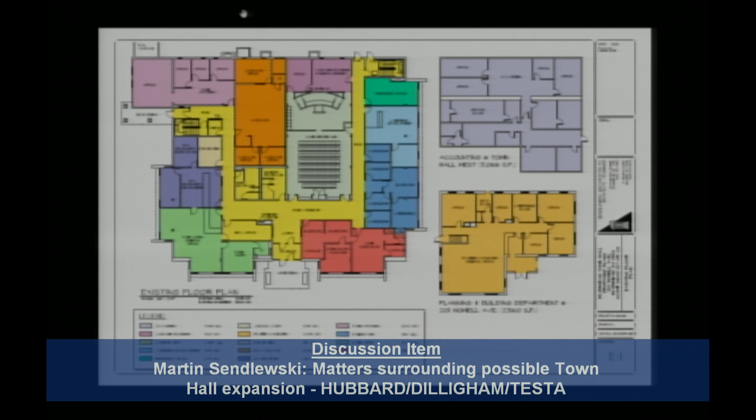What's up on the board here, and is the first page that you have in your packet, is the existing town hall. That's exactly what's here now. On the bottom right is the existing building and planning department across the street, and above that is the existing accounting and IT office in Town Hall West.

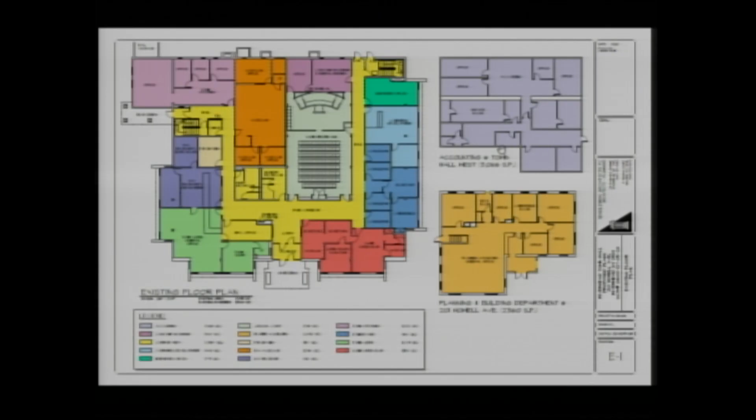So we then looked at what if we built a new town hall on that site as a campus development. That would allow the construction to happen somewhat seamlessly—build the new building, move in, then renovate this building and move Justice Court in, then add handicapped access to the police department and alter the area now occupied by Justice Court for the needs of the police department. What's on the screen is that last scheme, which ended up being the most economical, the most straightforward in terms of constructability, and we think ultimately the best plan.

This page shows the current site. Right here is the current town hall building, this is the current police department, and here is the footprint of the new town hall building. We maintained the accesses on Howell, added parking on the northern end, and placed the building here in a campus style. The town hall stays exactly as it is in terms of footprint. We altered the parking and provided additional parking across the front of the building.

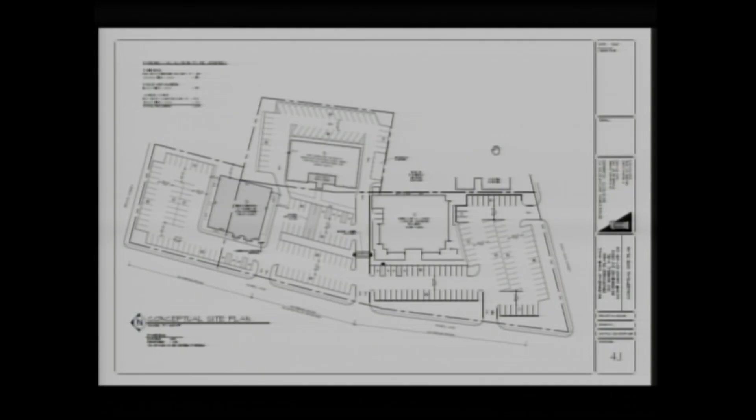We looked at a shared parking option where we came up with a requirement of 288 cars. We have 241 cars on site. One thing to keep in mind: the 288 cars included both justice courts, since they'll have two courtrooms fully occupied at 75 people per room, plus an expanded meeting room for town board at 150 people, all occupied at the same time. So we think there's a shared parking factor that would allow this to be adequate.

We also moved this parking a little bit, and we have a plan to move the Garfield Memorial close to the entrance of Town Hall and close to the flag outside, really where it should be. It's a very nice memorial to a real hero of Riverhead, and you never really see it—when I drive by, you look at it on the lawn, but it should be in a location where anybody who comes to Town Hall passes that memorial and remembers him for his sacrifice, especially coming up on this Memorial Day weekend.

With that, we developed the plan for Town Hall. This is a relatively simple drawing of just the basement. Overall, the footprint of the basement is 98 feet by 98 feet.

Constructability is very good. We have a 24-foot column grid with 1 foot from the center of the column to the outside face of the wall, which gives us a 98-foot by 98-foot column grid, or building footprint.

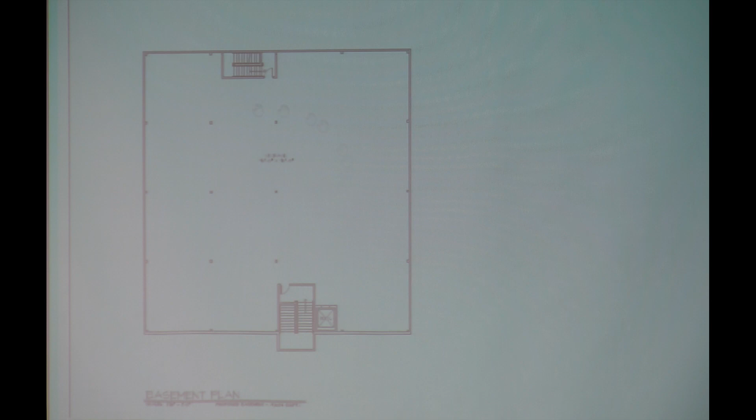So this would be the basement area, which would be utilized for storage.

So as you come to the first floor, what we've done, and what I'd like to explain is what this document does. This is not considered a final plan or a final document by any stretch of the imagination.

What we do as architects is we get the program, which we've established. And what this document does is really establish the fact that we have enough footage in this plan to accommodate the needs of the town. That is really what this does.

But if this were to move forward, there would be much more detailed reviews and design reviews with all the department heads, the town board, town engineers, et cetera, moving forward.

One of the things you'll see on the side of the page here is a legend, and all of the areas are color-coded, and it has the footage of each of the areas next to their allotted space.

If you go back to the existing plan, there is a chart here of all of the existing footages on the existing plan. So when you compare the two, you can see the increase of each department from the existing plan to their new plan.

So the first floor plan here includes a secure entrance with a mailroom coming into an expanded lobby. The lobby has a stair and an elevator to the upper levels.

Straight ahead are double doors into a new expanded meeting room. The meeting room has an IT room for broadcasting, et cetera, and there are 2 public toilet facilities located off of the lobby here.

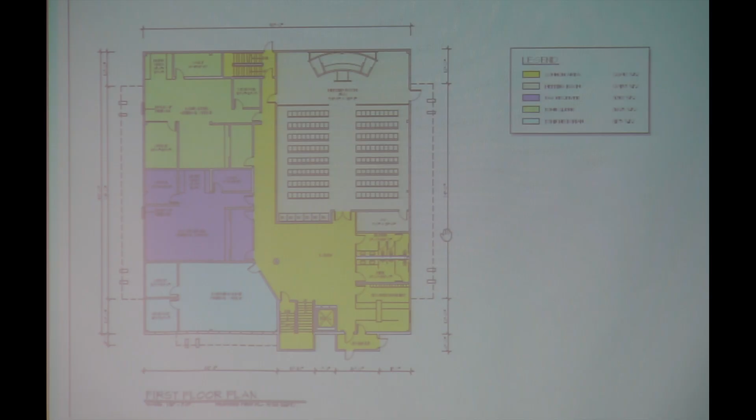So, they took into consideration future needs of departments as well. We asked department heads, do you think you're going to be adding staff? So like in purchasing, they think they might at some point have a second purchasing agent.

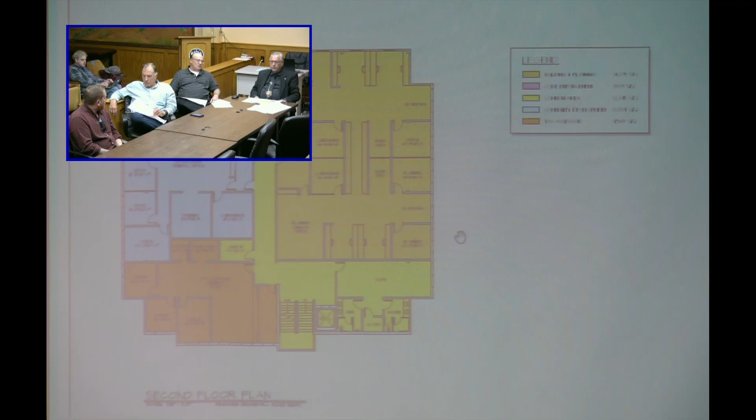So we tried to design the space so that when this building is done and you move in, you're not moving into a building that can't be expanded in the next 10, 15, 20 years. So there is future consideration given to the spaces shown on this plan.

With that, we come up to the second floor, and the second floor, again, the elevator and stair come into a second floor lobby area.

Off of that lobby, we have a staff area. That would be a staff room that would have vending, a small kitchenette, and it would also have staff-only bathrooms. That was one of the requests that came up, was to have staff bathrooms in addition to the public bathrooms, which we thought was a good idea.

So that basically is a staff area. You come down the center hall to the rear stair, emergency egress stair.

All of these hallways are 8-foot hallways, so they're the larger hallways, similar to what you have out in front of the meeting room here, not the 6-foot hallways they have on the side. So they're more than adequate in terms of space and people circulating.

On the second floor, we have the assessor's office directly off the lobby. We have a janitor's closet. We then have the community development office that has all of their needs with lots of expansion for the future.

And then we have code enforcement in the back corner here, and then we have an area here for building and planning combined.

That was one of the departments that, after the discussion, gave us feedback that they wanted rooms accessible for reviewing documents with applicants when they come in, where they could bring them into a small conference room and go over it. Instead of collecting documents and sending them back, they could go over it with them and tell them what else they needed so they could return with it.

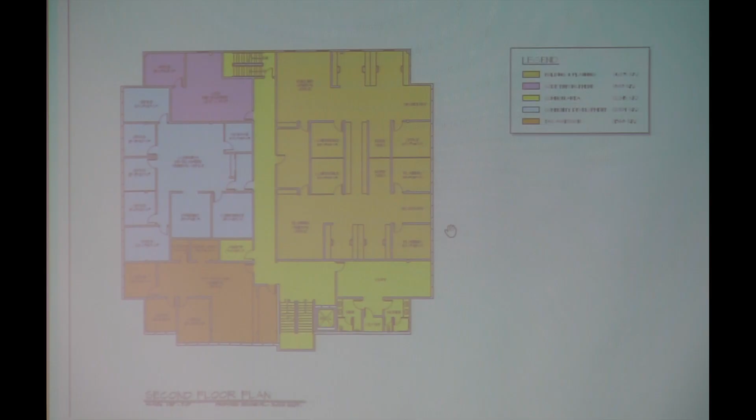This would allow you to surplus the existing building department across the street. You could use it for another purpose, or you could sell it or rent it, but it would no longer be needed. We'll discuss that later as a board, but we definitely would sell it to offset the cost of the taxpayers. That way, it's just a good possibility that they're not going to have to absorb the cost immediately. We can offset some of the costs initially.

The other thought we had was East End Housing, over at 209 East Avenue. They have a facility there. If we could move them into the new town hall as well, that would allow you to sell that structure, which could be used as a house, if we go forward with this as a board. We definitely have to entertain that component, that aspect, to offset the taxpayers' costs.

Then, as we came up to the 3rd floor, again the stair and elevator and hallway, we have human resources, the office requirements they have there on the front of the 3rd floor. And then off of the 3rd floor lobby, you have the town board offices and the town supervisor's office. And those are all laid out.

Again, the layouts are going to be things that would be reviewed with every department, all of the people. I've never done a project where, when we start with a scope and a preliminary plan that defines the program, the plan has been the same at the end of the day. There's always - we massage it, we go room by room and go through the design to make sure that all of the requirements are met when you move in to utilize the building.

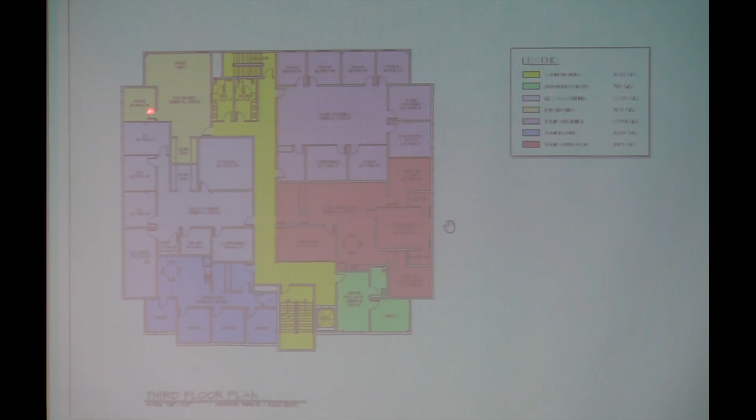After that construction was completed, we then did a preliminary layout of this building without any additions. It's the existing footprint - we would utilize as many of the existing walls and layouts as we could, where basically this transitions into a lobby area with a hallway into two courtrooms. This would be a jury courtroom, which would remain as is, and a new courtroom would be added next to it.

As you come in, there's a secure area with security and a mag. Off of the public corridor are the public bathrooms, as well as a housekeeping office, and then they have two consult rooms for attorneys coming in to meet with people who are going to go before the judge to have a private discussion. As you come to the other end of the hallway, there's a window into the justice court where people could pay fines, etc.

And then you have the judges and the justice court area in the existing area, currently where the town clerk and the tax receiver are. They also have additional facilities for storage, a lunchroom, and their own private bathrooms, in addition to the bathrooms in the facility.

That area connects to both of the courtrooms through a secure area behind the courtrooms, where you also have the jury room, additional storage, and in the upper left corner of the building is the secure area where they would bring in individuals to go before the judge. We have secure lockup, secure bathroom, secure access, and attorney interview rooms for people that are brought in.

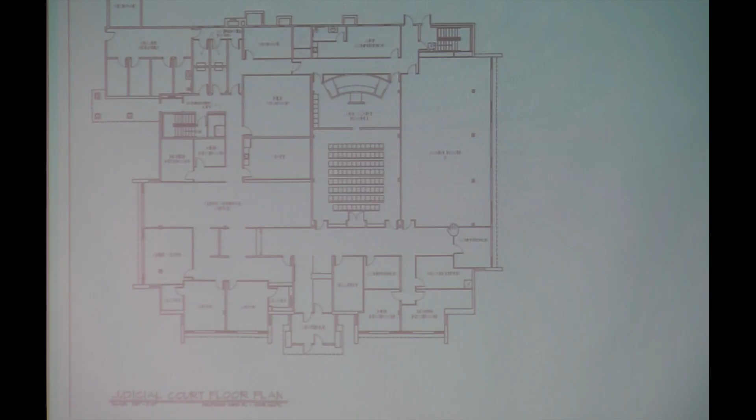All of this would have to go for further approval with the court administration. Again, it's really just a layout where we know that we can accommodate the requirements of the court within the existing footprint of Town Hall. From there, what we did would be the last step, and that is the police department.

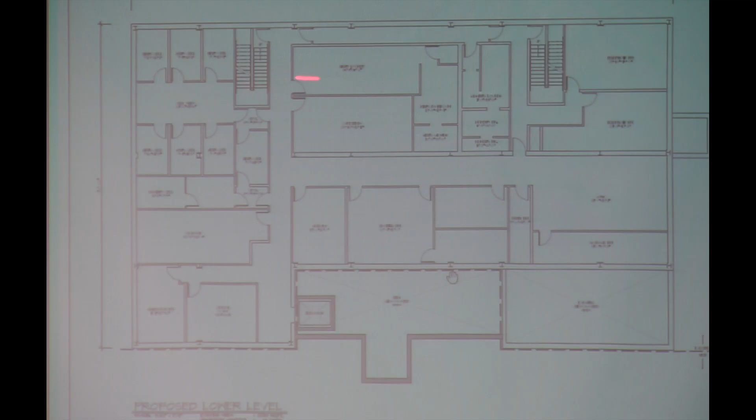This here is an unexcavated area on the lower level, and you see an elevator here. There is a stair here that we took out and created a lower level link to the basement from this elevator so that there's handicapped access. They still have the two stairs internally here in the back of the building.

And then on the main level, we have it set up where there's an entrance. You could go one way up the stairs or the other way up the elevator, which has a door on each side. So in the lobby, you enter this side.

On the upper level and lower level, you enter from the opposite side. That brings you to a new hallway that wraps around between the stair and the elevator for the public to approach, and you would have the window where the desk sergeant is. That would be extended forward to what is now the doorway into the building.

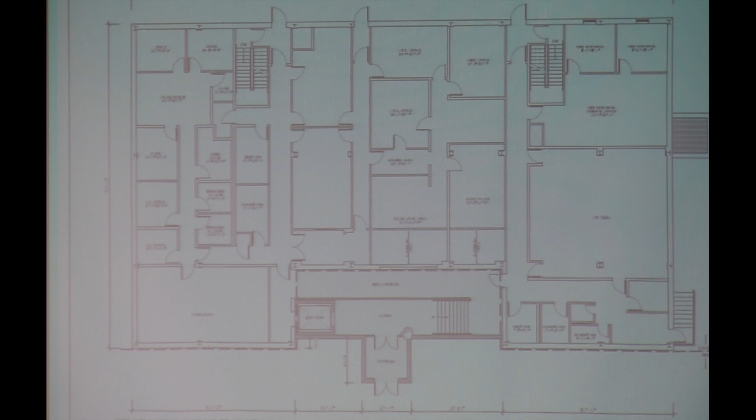So they would gain some space there, and they would gain this entire space where the current Justice Court exits the building. That gives a location for the fire marshal to have his own space also. So with that, now I'll get to the next part of the presentation.

What does it cost? What I have here is the cost of the different components that I spoke about in each of the different schemes. So we had a scheme where we were just doing handicapped access and improvements to PD.

We had the scheme where we were adding the Justice Court on top of PD, which then required not only the front elevator and access, but a secure elevator in the back. We had the second floor addition here. We had the standalone court. We had the standalone town hall.

So what you see here is itemized one through five. The standalone court building, when we completed that, was 11,025 square feet. The cost was approximately $11.5 million, $11,493,000. The PD, with just handicapped access and renovations, came in at $1,158,000.

The town hall expansion with the second floor over this building, which is the most expensive project because of the type of construction, and again, being over this building, was $19,176,000.

The Justice Court addition on the police station and the improvements to the police station for handicapped accessibility was $15,381,000.

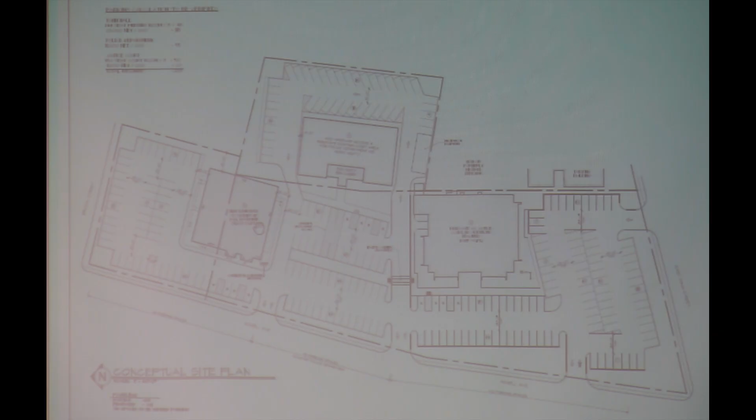One of the things we wanted to do was take the area that you cross in front of the building. Let me go to the site. What we wanted to do is take a look at the parking area in front of the building, where we could also do that area with drainable pavers, similar to what they have at, say, the aquarium, and do that with landscaped islands so that you could have that blocked off on the weekend if you had a function, or even if you had something going on during the day, you could set that up as an alternate area.

Plus, we're looking at the siting of the building. I held the building 25 feet off of this corner. If we could site the building a little bit closer to that line, take about 12 feet, about half of that setback, and push it back a little bit further to this corner, that opens up more area in the front of the building. That expands the area, in addition to that paver parking area, so even if the parking lot was not closed off and was utilized, we would still have an area in front of town hall for those types of functions.

So we would look at some type of a canopy, and again, really important, having the Garfield Memorial, as well as the town flag and the American flag at that location. So it would be a nice area we would dress up. It'd be something nice, have people come together, whether you have something to give away, or you have a press conference, or some type of event.

And with the first floor lobby being open up for bathroom access, if you do a function on the weekend, the rest of the first floor stays secure. So it works out well. That is a good point, because you could have the front of the building opened up, and you could have a function outside with bathroom access, and it's a pretty adequate lobby. We have a nice lobby space, so that could work out very well.

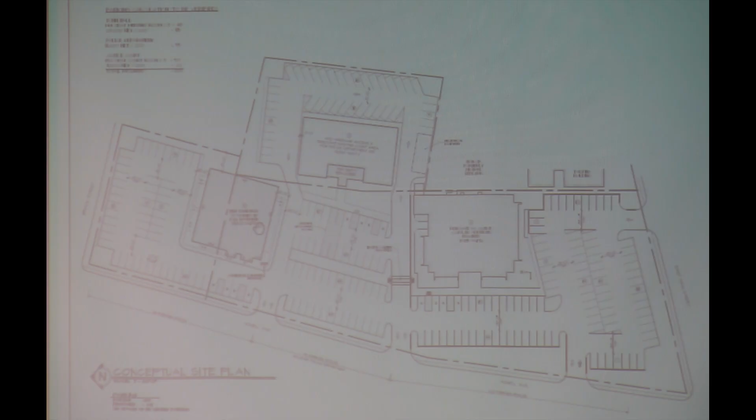Well, I think this is a great starting point, no doubt about it. When can we put the shovel in the ground? What would have to happen most immediately is, one of the things the town needs is a full topo and utility survey of the entire property. You don't have any updated surveys, so you really need to get a full survey of the whole property, and test borings - at least 4 test borings done of the property, and then you would have to decide how you're gonna move forward.

We've basically just done this to help the town out, to make a decision. So you'd have to make a decision, and hopefully that would include us coming into an executive session, discussing moving ahead with the project.

Marty, I know you briefly mentioned OCA, the Office of Court Administration. When we have somewhat of a final draft, I would run it by them before we move further. Because I can assure you, they're gonna have changes and that's gonna change the cost, and we gotta engage them in the beginning, obviously. We're not gonna build a building and call them in, and they go, okay, take this wall down, we need another entrance.

I know the security parameters have changed from the time that that was a justice court. They've changed dramatically, so now they have different types of glass requirements and certain security and space at certain intervals, so that might be a little bit of a challenge for you. When you get to that point, you might want to just show them the plans.

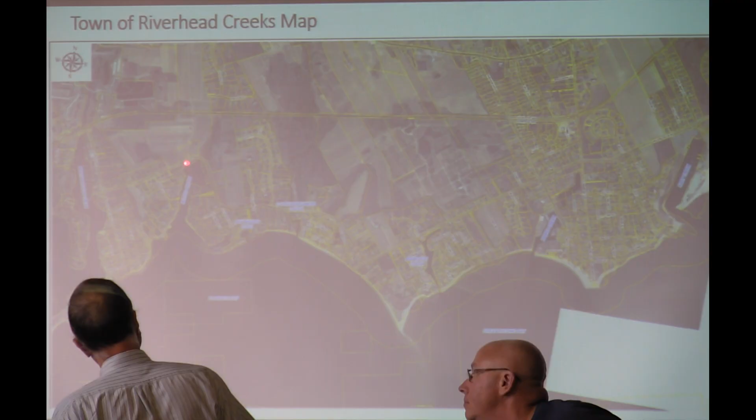This is Reeves Creek right here. And then the last is Meeting House Creek right here. Next slide.

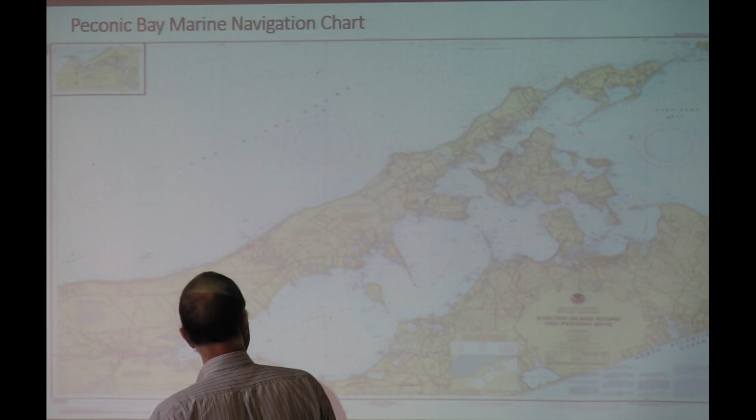Okay, yeah, that's gonna be way too hard for everyone to see. Go to the next one.

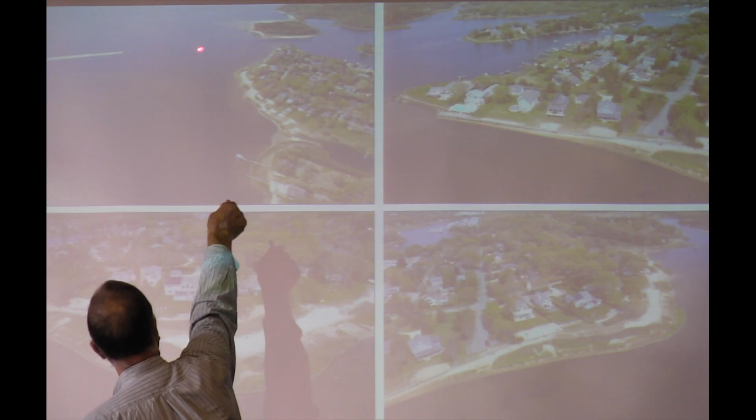Okay, so Reeves Creek extends from Meeting House, which is in here. The channel begins right here for Reeves Creek and runs north-south, and this is a sequential series of photos proceeding from Meeting House north through Reeves Creek. And you can see the shorelines.

By and large, most of it is developed. There are some sandy areas. Most of them are covered with native beach vegetation. Next slide. And here's an example of the beach vegetation.

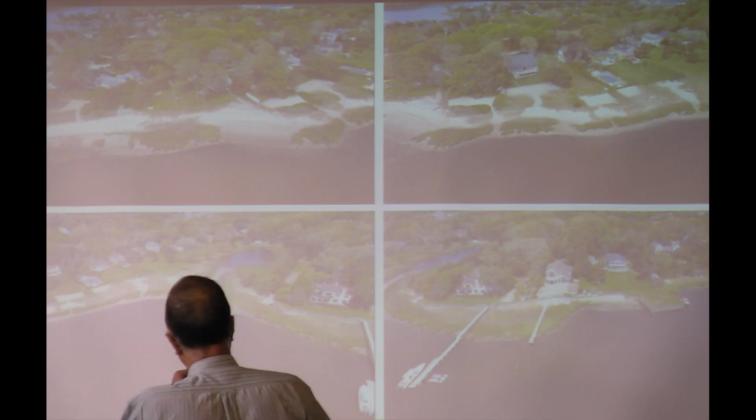So again, this area is either privately owned or covered with beach vegetation, or else it's hardened. Next slide.

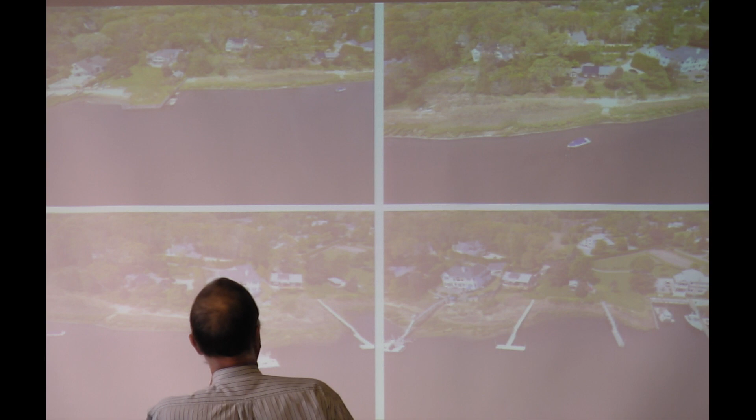This is about midway down Reeves Creek. And again, keep in mind that there's 24,000 cubic yards that have to be dredged from Reeves Creek Channel. As you can see, there's not a lot of area to place the spoils.

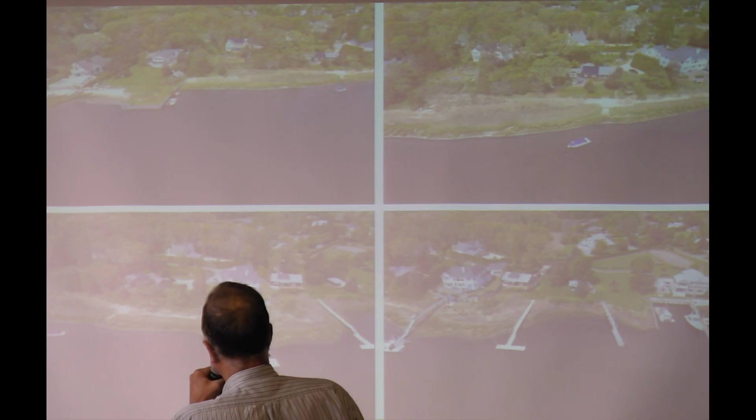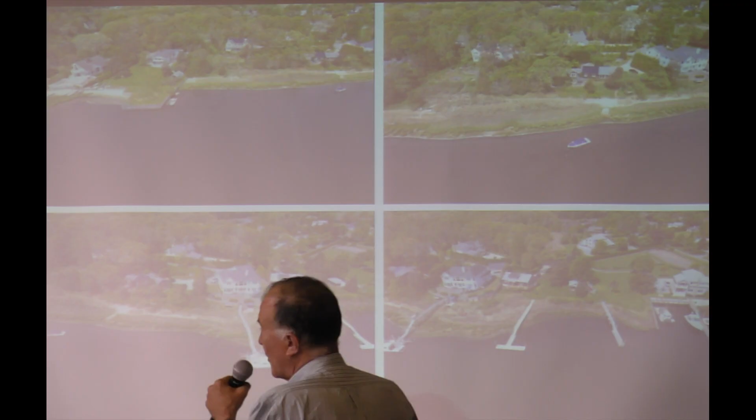The other issue is there's a lot of mud and roadway runoff, and it hasn't been dredged since 1964, so there's probably going to be some contaminants. If there are contaminants in the mud, then the town is responsible for disposing of those contaminated spoils, or finding another place upland to dispose of the spoils.

And as far as public benefits, I spoke with the people who would know, and they indicated that they really don't see any improvements since the last two times the application was made to the county.

The other issue, obviously, is having the total area to dispose of the sand after the mud is removed. And we just don't have, we really don't see the space.

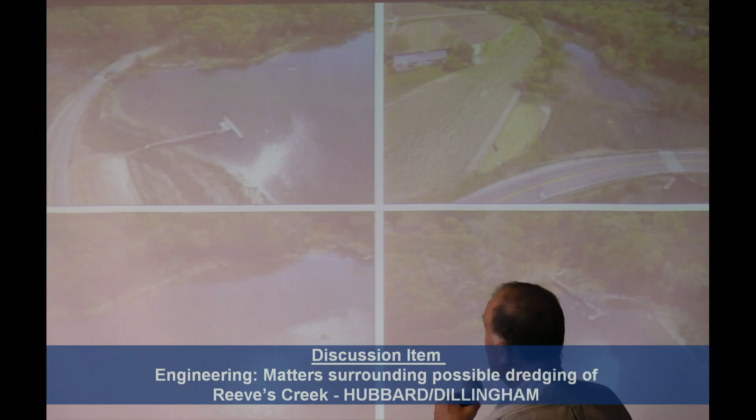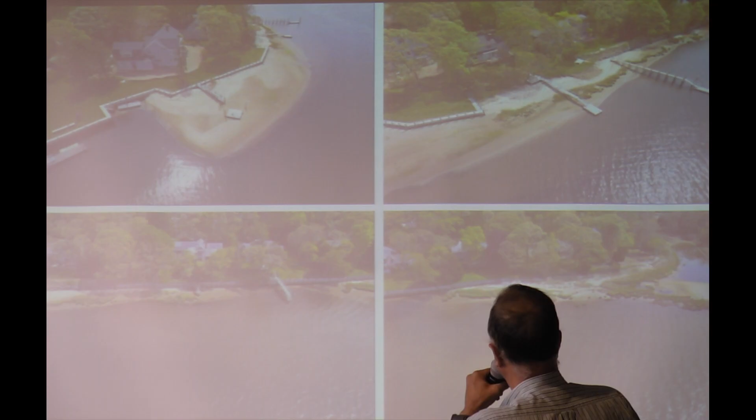Next, is that it? And that's still more of the end. Go ahead, Chip. Keep going.

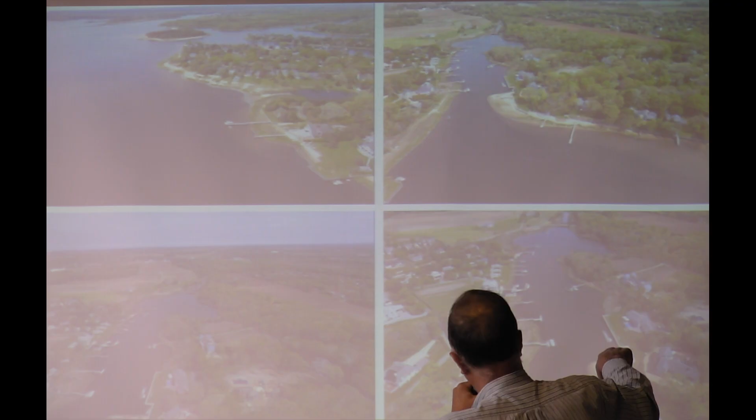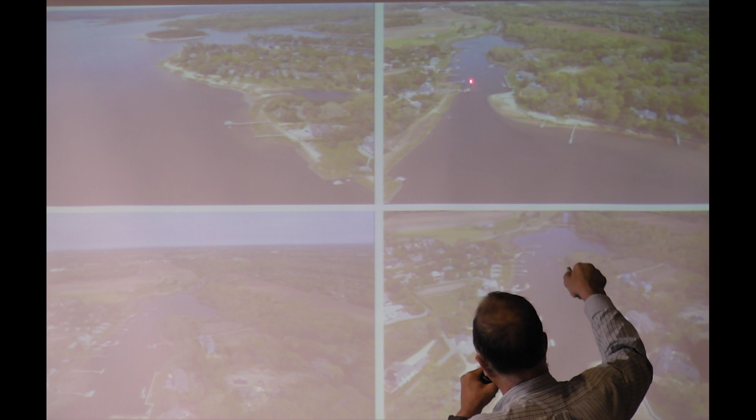This is kind of a beginning view of Reeves Creek heading from south to north. And here's another. Down here is Meeting House Creek, and you can kind of see the channel going up through Reeves Creek. Next.

So all these photos were taken by Riverhead PD drone, which was a tremendous help to us.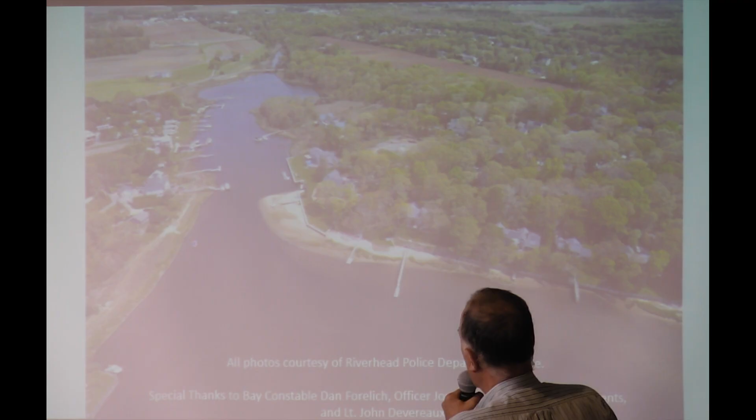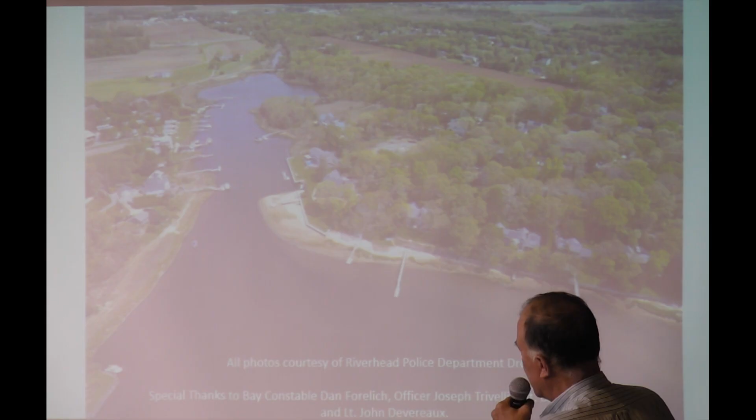So right now, where we're at is the board's got to make a decision which direction we want to go. In order to progress any further, we would have to put up $75,000, have the sediment sampling done, have the hydrographic survey completed, and then we would have to prepare the screening application, submit it to the county, and then the county would make a determination whether or not there would be a hearing, whether it would even go that far. So we could spend $75,000 and the county could say no go.

Past history and my discussions with the Bay Constables and Division of Waterways and DPW would indicate that there's very slim chance for the county to approve this based on public benefit.

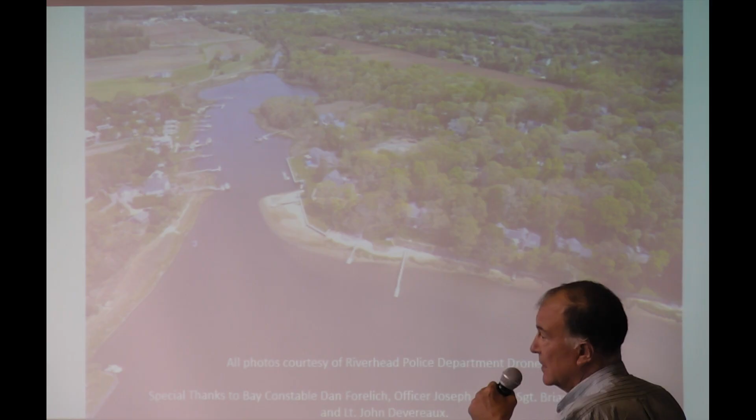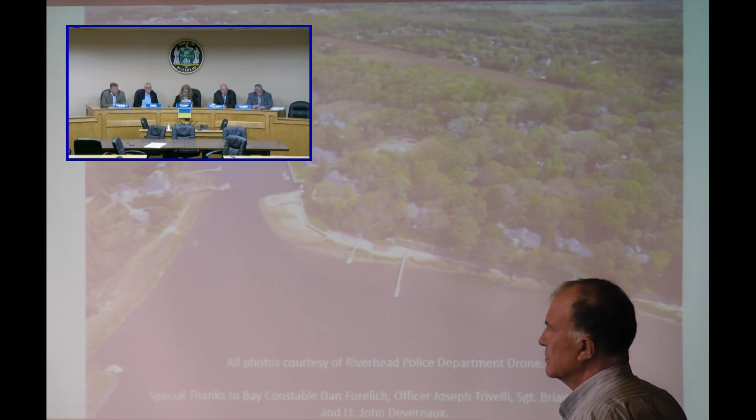Drew, do you know if any of these waterways would impact any aquacultural entities that are growing oysters or clams? We have a very robust aquaculture farming here in Riverhead, and I just would be upset if it was going to impact their practices. The reason I'd say no is because this channel—well, if the channel was maintained, I'd definitely say no, but maintaining the channel allows boats to go in and out or navigate, and there's really no shellfish in the channels.

Okay, and that's the only thing that's gonna be dredged. We're not doing anything, they wouldn't be doing anything new, but again, since 1964 it hasn't been dredged, so I'm sure there's something in there. But that's not a commercial aquaculture area, no.

I can tell you from personal experience, some of the largest chowder clams I've ever seen in my life are on the bay bottom, outside the entrance to that creek. It's like walking on sand, but it's clams that you're walking on. And it's not open for public consumption because it's illegal to clam there. I'm just speaking that I have walked on that bottom, and I have scooped them up and put them back. Oh yeah, absolutely, and they're huge. I mean, it's because it hasn't been clammed or hasn't been open for years. I'm sure the whole thing's like that.

Any other questions? So, to Ken's point, I mean, we spend $75,000 and DPW says no. What have we gained? Nothing. So, another question is, is there grant money available for that $75,000?

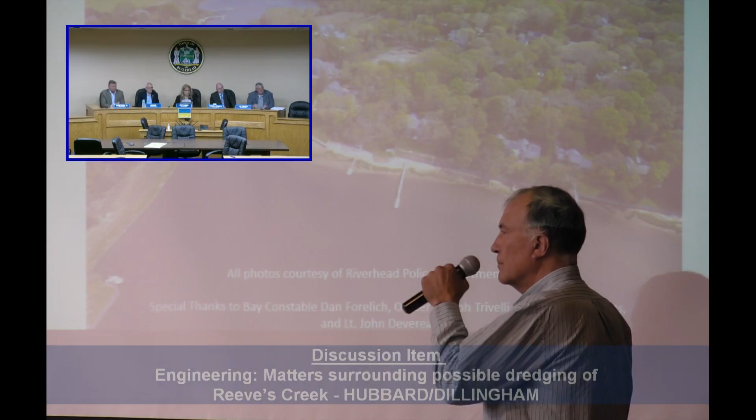Meaning public benefit, meaning that there's not new docks and new people in the area that would require use of Reeve's Creek? What does public benefit mean? Okay, so public benefit means there's no public beaches, there's no public boat ramp, there's no services such as gasoline or food, there's no public parking. Just everything there is a list of private houses.

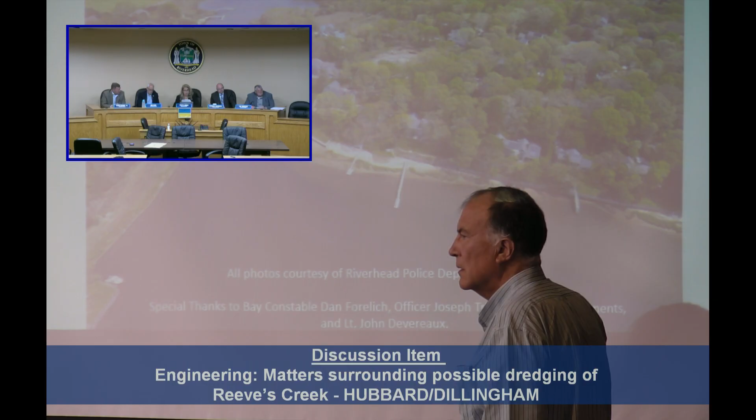Joe, I was in a meeting in Sag Harbor yesterday with the supervisors, and there was a representative from Zeldin's office there, and they indicated that they were putting in funding for one of our creeks, so I think we should follow up on that.

Who's the representative? Mark Woolley? Mark Woolley's the person who's been representing Lee Zeldin's office and in contact with us over Reeve's Creek. Okay, I know he read off a list of funding for creeks, and Riverhead was on there, so we might want to follow up. Yeah, that could be anything, but I'll follow up. Okay.

Anything else? Well, I'd like to explore it further to see if we could get some funding, to see if maybe the congressman's office may have some funding available. I'm not sure how it works, but it's something to explore at least anyway. I'm not in favor of just throwing $75,000 out the window and hope we're going to be able to dredge it.

But it has been a long time since it was cleaned out. Thing is that even if the county approves it, once we dredge it, there's nothing for the public there. We've dredged it so that the local residents can use it. I mean, someone could navigate in and out, but there's nothing for them there.

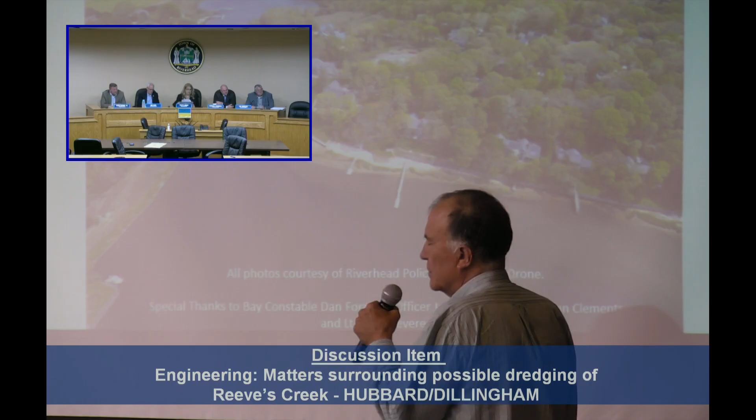How many residents' properties do you think are impacted by that? I know that the petition had over 100 signatures on it, but that could be friends from Florida, you know? Snowbirds. Is there 100 properties, you're saying, or just, not even close now. So 20 houses? What's low tide, do we know what low tide is there?

I mean, do we know what the low tide is in the creek? I'm just curious, because that's what they're looking to do, right, is to dredge it, and I don't know what. Well, even at low tide, there's barely a couple of feet of draft through the channel right now, that's what I'm wondering, yeah.

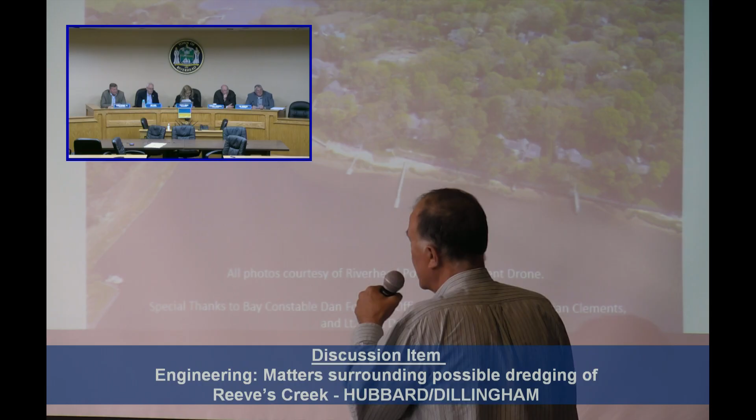Okay, well then, thank you, get back to us, and let us know how you make out with the congressman's office and see if there's some availability. If there isn't, there isn't, but I would at least like to explore everything that we can. Thank you, if need be, Joe.

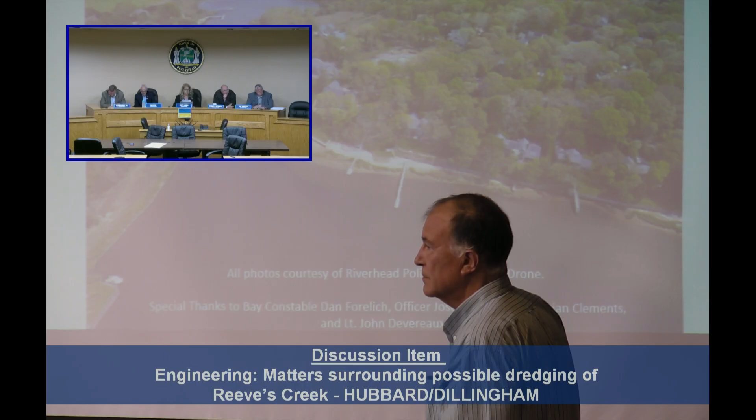Drew, we'll get you out there with a shovel and let you start digging. I'll bring back some of those clams. I'll keep all the clams. Just watch those clams, they're huge.

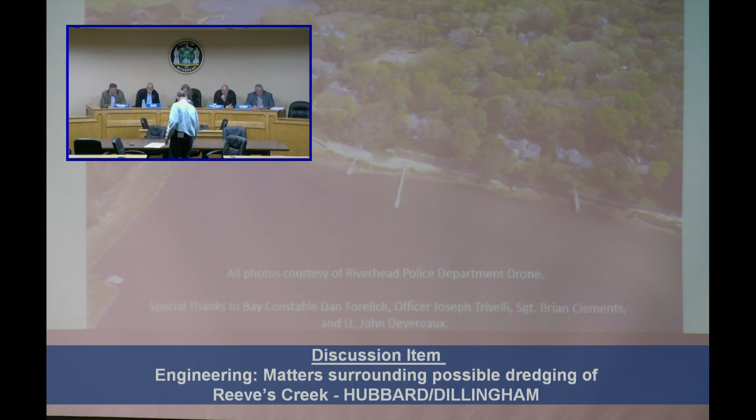I think if that's the same, if we said, if we didn't do a project like that, if we declined to do it, is there even feasibility that residents — the reason I was asking how many houses, if there's 20 homes or 30 homes there, and the residents themselves wanted to pay for the sampling to be done to get, to potentially come back, is that something that can be done?

Yeah, there's no reason why it couldn't. I just don't know how willing anyone is to pay. Obviously funding's a concern, but if they said we wanted to explore this as far as they can, if it impacted 20, 30 homes, and they were willing to do that to try to get on the county's list of dredging, if it's only impacting really private homes in the area, can the expense be potentially borne by those residents?

And the secondary expense of us having to dispose of the sand and everything else. I totally forgot about that. Any contaminated material, yeah, we pay for. Yeah, we're responsible, I think, and it's not cheap, it's gonna be costly, right? So trying to look at both sides, maybe how you can help them or not, maybe. Yeah.

If you could build a creek all the way to my house, I could get a boat dock. Yeah, I went through this once with Wading River Creek, and they rejected it for the same reason: no public benefit. And yet, at the end of it, there's a boat ramp and a dock.